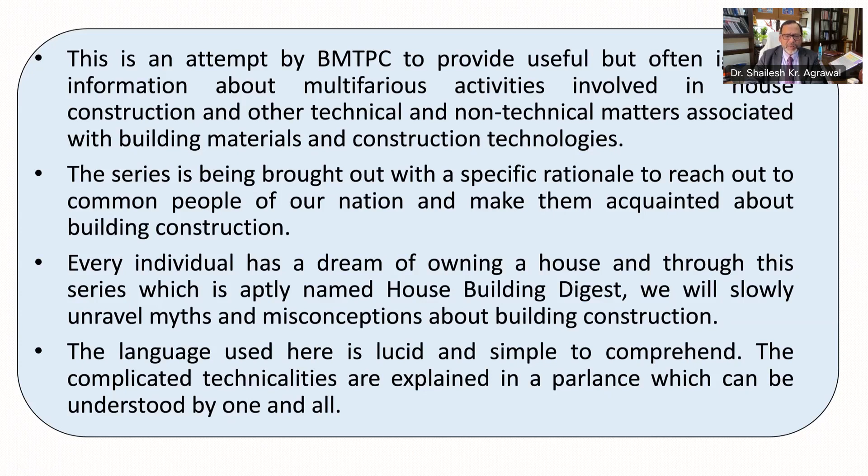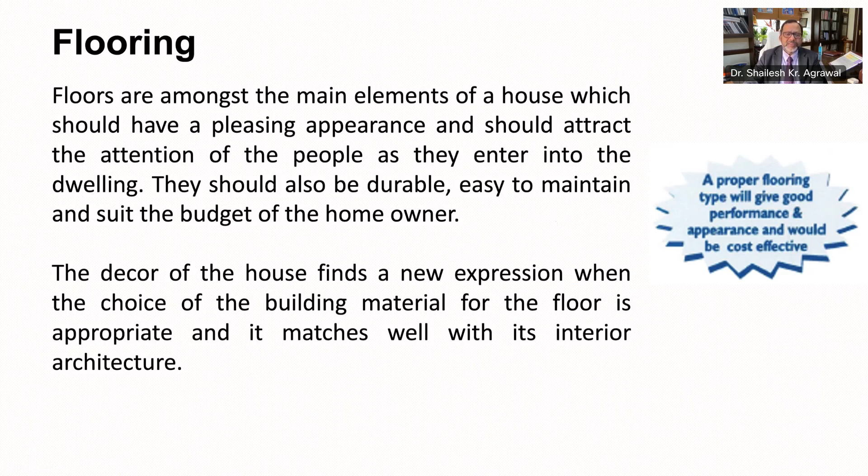Having discussed main building elements, including doors and windows, now let us move to floors. Flooring, being a main element of the house, must have a pleasing appearance and should attract the attention of people as they enter your house. Also remember, flooring should be durable, easy to maintain, and suit the budget of the owner. Normally, choosing a floor of appropriate material and appearance matching the interior architecture of the house gives aesthetic and new expression to the house. In this digest, we will discuss different types of flooring to choose from.

There are different types of flooring: brick floors, mosaic floors, tile floors, wooden floors, cement floors. There are umpteen number of flooring options available nowadays. Therefore, the selection requires careful consideration, and different types of flooring are to be provided based on the use the floor is being put to. For example, the living area may have a superior quality floor, the bedroom may be of good quality, and wet areas may have floors avoiding skidding, so the type of flooring has to be chosen accordingly.

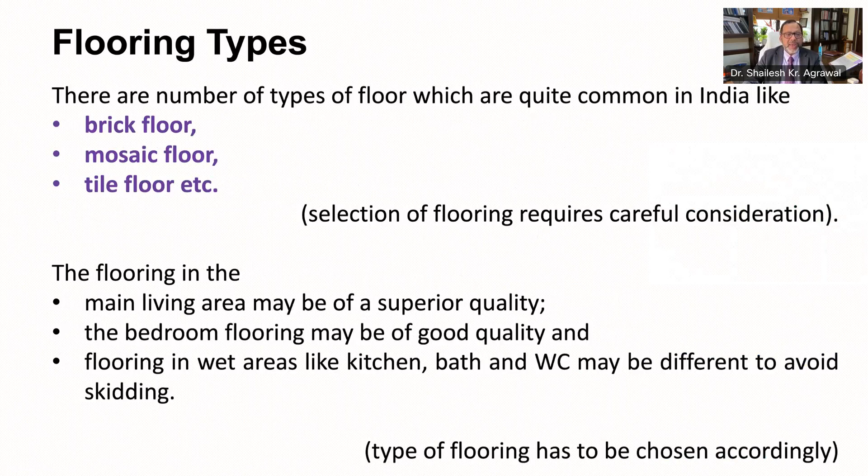Similarly, let's talk about climatic conditions. The flooring to be chosen depends upon the climatic conditions. For example, in extreme hot or cold conditions, marble or stone flooring needs to be avoided as it may make walking difficult. Similarly, slippery floors are to be avoided in exterior locations such as balcony, terrace, or wet areas.

It is pertinent to mention here that flooring for non-residential areas like institution buildings, airports, factories are provided in different manners as they are subjected to heavy use. Please remember, flooring to be adopted for the house therefore depends not only on use of building and climatic condition, but also on local availability of material and flooring. Also, overall costs need to be kept in mind while choosing flooring.

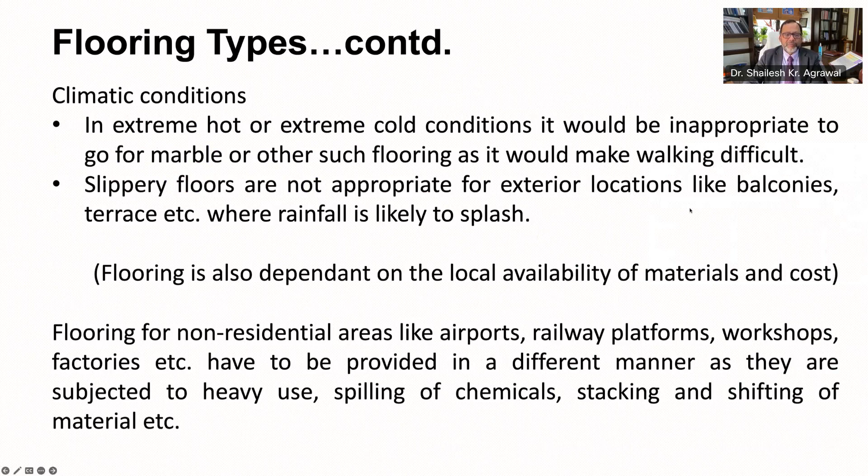Now let's discuss different types of flooring. As you can see here, the most common types of flooring used in India include mud flooring, brick flooring, stone flooring, concrete flooring, terrazzo flooring or mosaic flooring, marble flooring, tile flooring, wooden flooring, bamboo flooring, and linoleum flooring. All these kinds of flooring have different performance characteristics and will be explained to you in subsequent slides.

It is always advisable to have a look at the flooring being used in the area and also discuss with your architect before choosing the flooring for your house.

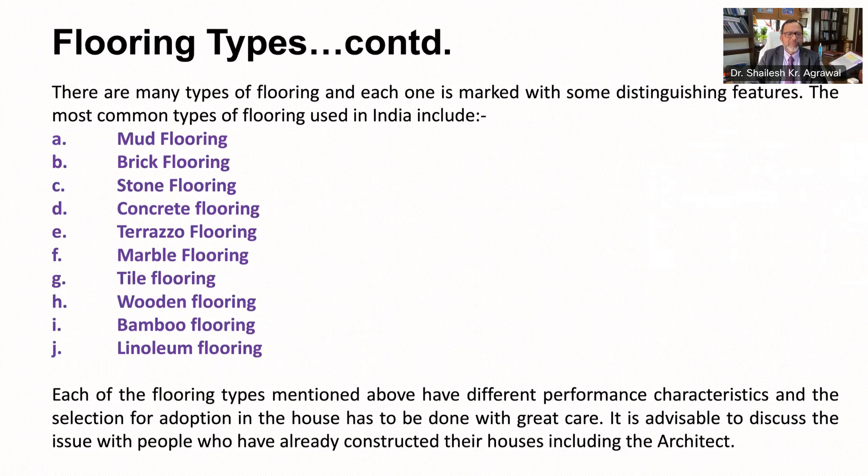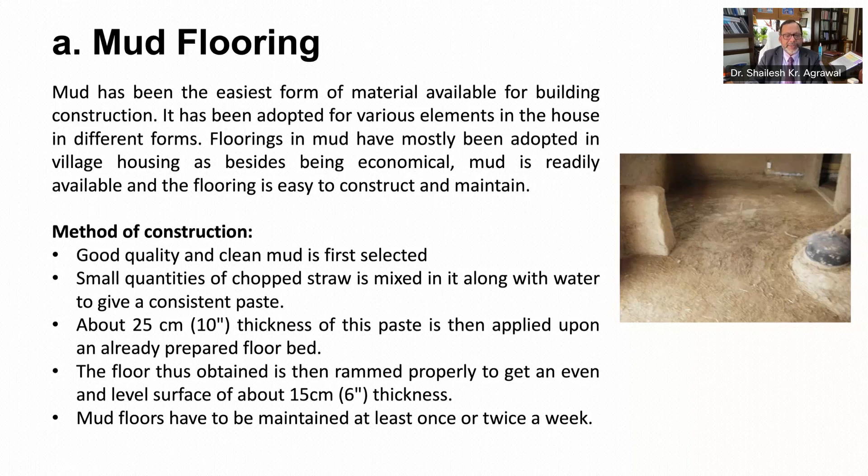Let's see mud flooring. Mud flooring is quite popular in village housing as it is readily available and its construction is very simple. First, good quality and clean mud is selected and mixed with chopped straws or bhusa along with water to get a consistent paste. This paste is applied on the already prepared bed of the floor and rammed properly to get an even and level surface of about 6 inches. Your mud floor is now ready. These kinds of floors need to be maintained once or twice a week.

Now let's see brick flooring. Brick flooring is of two types: bricks on edge and bricks laid flat. Bricks have been the mainstay of building construction in India since the time of Mohenjo-daro and Harappa. It has been successfully used for foundations, walls, roofs, etc. Brick flooring is advantageous in areas where bricks are available locally. Such flooring is easy to construct with the help of local masons and is also economical.

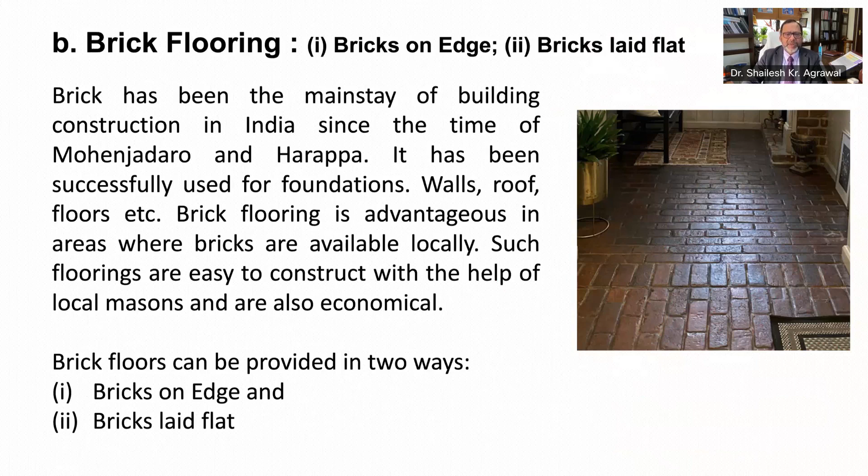Brick floors can be provided, as I told you, in two ways: one is bricks on edge and another one is bricks laid flat. Bricks on edge flooring is most suited for ground floors in a house for interior locations. They can usually be provided as exposed flooring or having a plaster coat on the same. Plastered floors in bricks are better suited for exterior locations like verandas, courtyards, etc., or wet locations like kitchen, WC, etc.

To construct this type of flooring, the filled up earth under the flooring is compacted well, followed by laying of about 10 to 15 centimeter or 4 to 6 inches of cement concrete in proper slope for draining out water. Bricks required for flooring are to be adequately soaked in water for at least 6 hours before use so as to keep them wet.

Then a 12 mm mortar is laid on the already prepared concrete base. On this mortar bed, bricks are laid on edge and jointed with mortars. Bricks can be laid in a pattern.

If the flooring is to remain exposed, the joints should be rendered flush and finished to get an even surface. The surface so obtained should be kept moist for a period of at least 7 days.

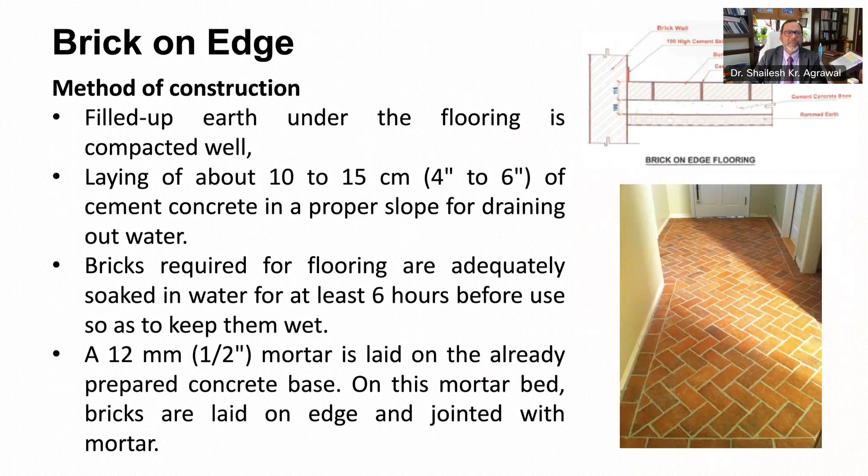Now let's discuss bricks laid flat. These kind of flooring with bricks laid flat are prepared in the similar manner as the bricks on edge flooring. In this case, the brick floor thickness is kept 7.5 centimeter or 3 inches as against 11.5 centimeter or 4.5 inch in case of brick on edge flooring.

The number of bricks used in such a floor is less than the numbers used in brick on edge flooring, as also the quantity of mortar. Such flooring system is most suited for upper floors as the weight coming on the walls and foundation is comparatively less on upper floors.

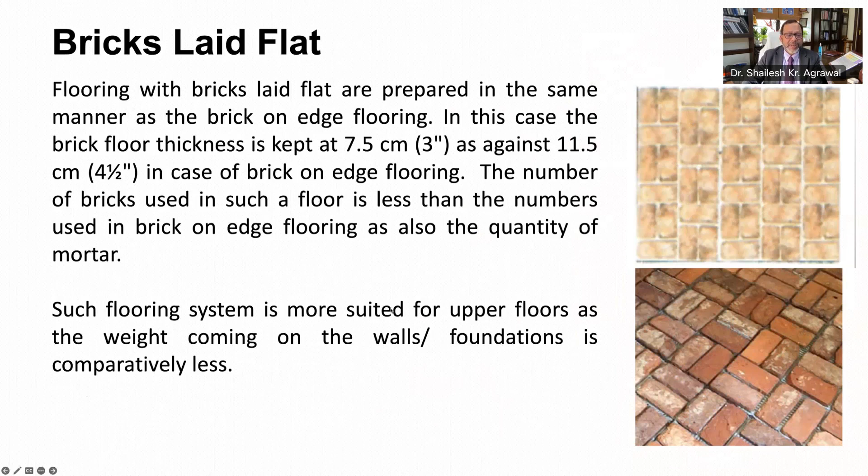Let's see now stone flooring. Stones are available in plenty across the entire stretch of the country. Many of these are suitable for providing floors in residential construction. You can see Kota stone, sandstone, granite. Stones suited for the purpose should be strong and able to withstand abrasion and impact besides giving a pleasing appearance. Let's discuss them one by one.

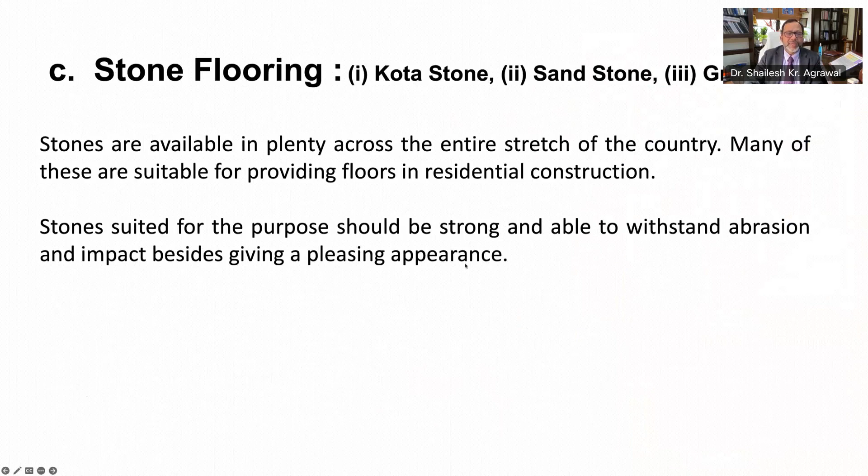Kota stone is a quarried stone which is cut into different sizes for the purpose of providing flooring in residential areas, including on steps, risers, and landings. The stone used for the purpose should be of good quality, free from cracks and other such flaws. The thickness of the stone may vary from 2 centimeter to 4 centimeter depending upon the location it is being used. The top surface of the Kota stone is polished before being brought to the site.

For laying the Kota stone flooring, the following method is to be adopted. First, the base concrete or RCC slab is to be cleaned, wetted, and mopped. Then, cement mortar of proportion 1:4, 1 cement and 4 coarse sand, is spread as a bed having an average thickness of 2 centimeter. The stone is then cleaned, washed before placing it on the mortar bed. The stone is then tapped with a wooden mallet to enable proper fixing. The process is continued till the flooring is achieved in a proper slope and finish.

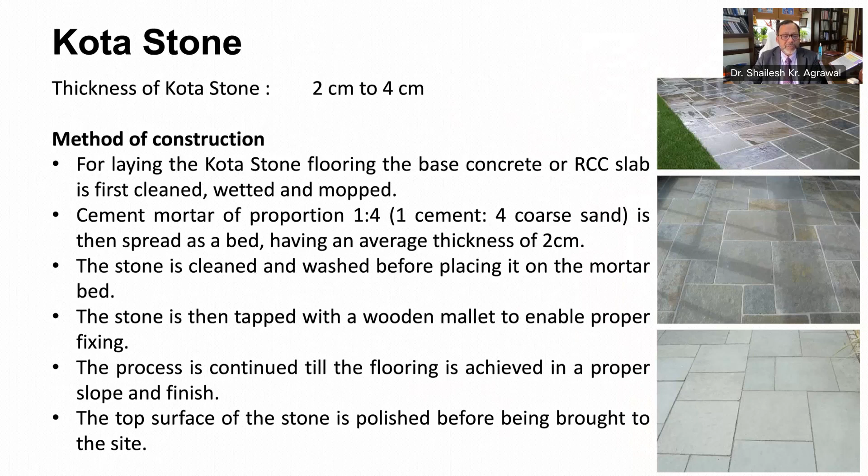Now let's discuss sandstone. Sandstone is another type of stone having different physical and chemical properties as compared with Kota stone. It is usually available in white or red color. Each stone is cut into required size and shape for application as flooring. The finish thickness before application is usually 4 centimeter or 40 mm.

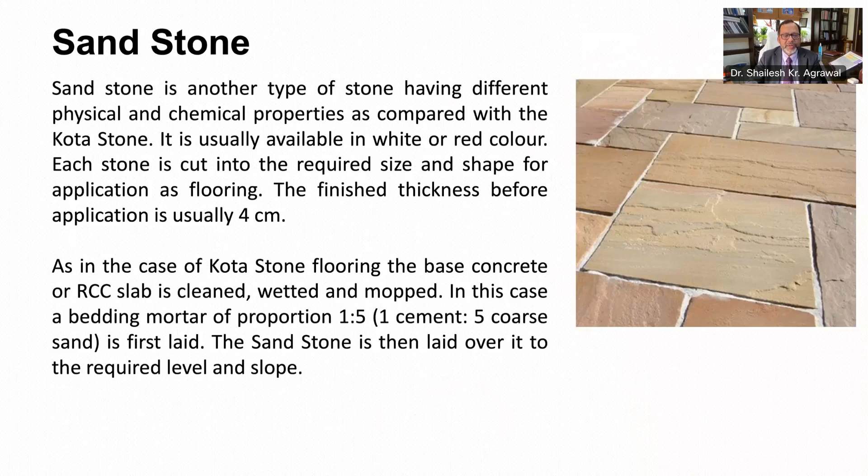As in the case of Kota stone flooring, the base concrete or RCC slab is cleaned, wetted and mopped. In this case, a bedding mortar of proportion 1:5, where 1 is cement and 5 is coarse sand, is first laid. The sandstone is then laid over it to the required level and slope.

Let's now move to another kind of stone flooring, that is granite floor. Granite is a natural stone which is immensely used in house construction, including of floors. It is available in various forms like tiles, blocks. Its fabrication and polishing is also a well-defined process which needs to be executed only by well-trained and experienced hands. The natural shine of granite may last forever if it is treated with care. Flooring with granite is amongst the costliest, although it gives an elegant and pleasing look. The laying procedure for the granite stone flooring is similar to that of Kota stone or sandstone.

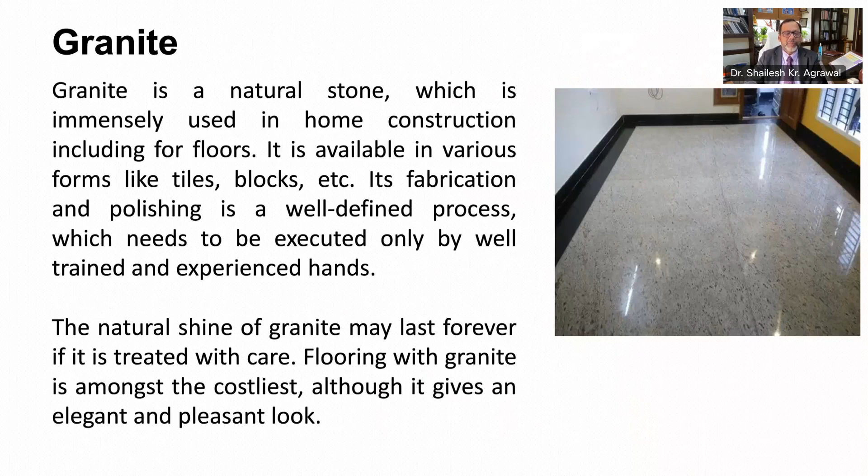Next is cement concrete flooring, also known as IPS flooring. This is one of the most common types of flooring provided in houses. It is quite durable and easy to construct and maintain, besides being economical as compared to tile, marble or other such types of flooring. In most government houses, this kind of flooring used to be preferred.

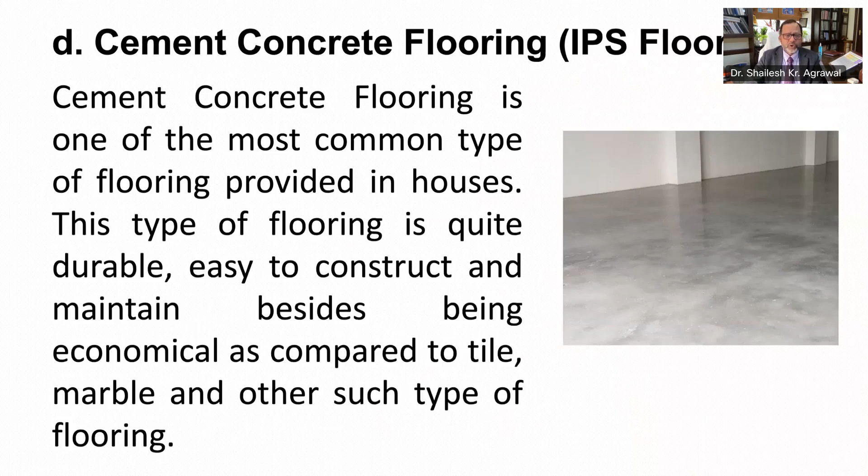When such a type of flooring is to be used for the ground floor, the following procedure is adopted. First, the earth in the plinth is properly consolidated. Then a layer of clean coarse sand about 10 to 15 centimeter thick is uniformly spread over the earth filling. During its consolidation, care has to be taken that a proper slope as required for the floor is provided.

The base concrete, either in cement or lime, should be laid about 7.5 to 10 centimeter thick over the coarse sand in the required slope, and tamped properly. The top of this base concrete should be leveled to a rough surface and left to set and harden.

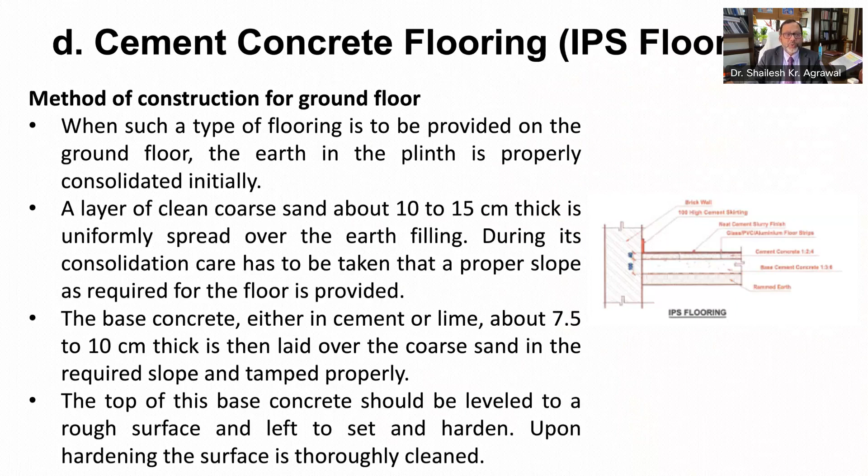Upon hardening, the surface is properly cleaned. The top of the floor is then divided into panels, rectangular or square in shape, by using glass or other strips. The area of each panel should preferably be less than 2 square meters.

Once the paneling has been done, the top of the base concrete is made damp and cement slurry is applied on it. This slurry creates a proper bond between the base concrete and topping. Normally, cement concrete of 1:2:4, where 1 is cement, 2 is sand, and 4 is coarse aggregate, of required thickness, say about 4 centimeter, is provided as topping concrete.

The top surface is thoroughly tamped and floated with wooden floats to obtain a smooth surface. The surface so obtained is cured for about 10 days before putting it to use.

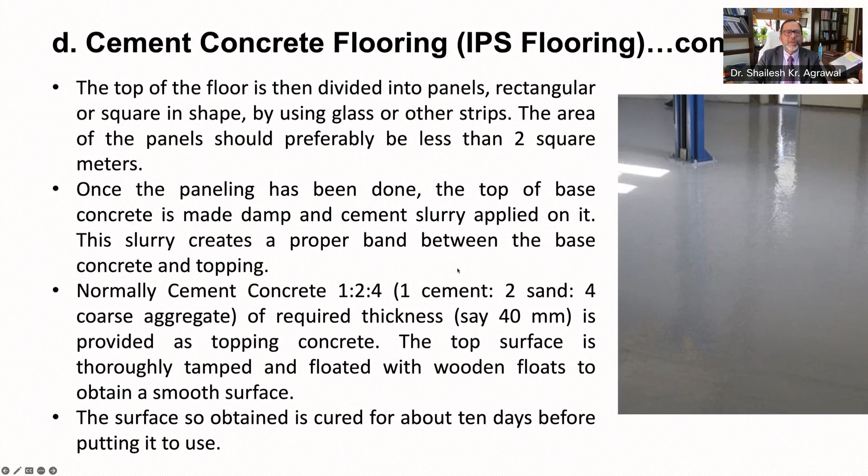Now let's see cement concrete flooring for upper floors. When this kind of flooring is to be provided on upper floors, the top concrete, as you can see in this figure, is laid directly over the RCC slab. At times, a cushioning layer of lime mortar is also applied over the RCC slab before laying the top concrete.

Cement concrete flooring can be finished with a plastering layer of 10 mm thick red oxide of iron, which would give a red color look to the surface. Different designs can be made by forming panels in the floor and filling them with plasters of required color.

Lately, there has been a practice of polishing cement concrete floors to give them a shining finish. Polished concrete is a high gloss finish attained by using special floor polishers to grind down surfaces to the desired degree of shine and smoothness. The resulting surface requires less maintenance and can be stained to replicate the look of polished stone. Polishing of concrete floors adds to its cost.

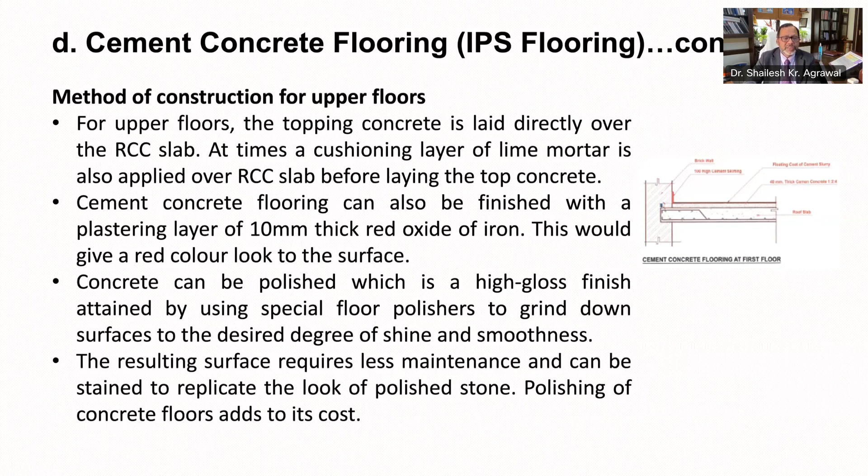Now let's move to another category, which is mosaic flooring or terrazzo flooring. This is another type of flooring that has been commonly used in India. As this type of flooring gives a pleasing look, it has been extensively used for living rooms, bedrooms, etc.

This type of flooring is provided in the same manner as cement concrete flooring, except that the top layer consists of terrazzo, which is a mixture of marble chips and white or colored cement in the ratio of 3:1. For a 40 thick terrazzo floor, an upper layer of concrete 34 thick is first provided over the base concrete, which is finished with a topping of terrazzo 6 thick.

Paneling, etc., can also be done as in the case of cement concrete flooring. The surface obtained after application of the terrazzo floor is damped and rolled and left to dry for about a day or so. After this, the surface is cured for about 2 to 3 days with standing water.

The grinding of the surface is then done 2 to 3 times, either by hand or by grinding machine using carborundum stones. In case the chips become loose or come out of the surface, repairing has to be done with cement grout.

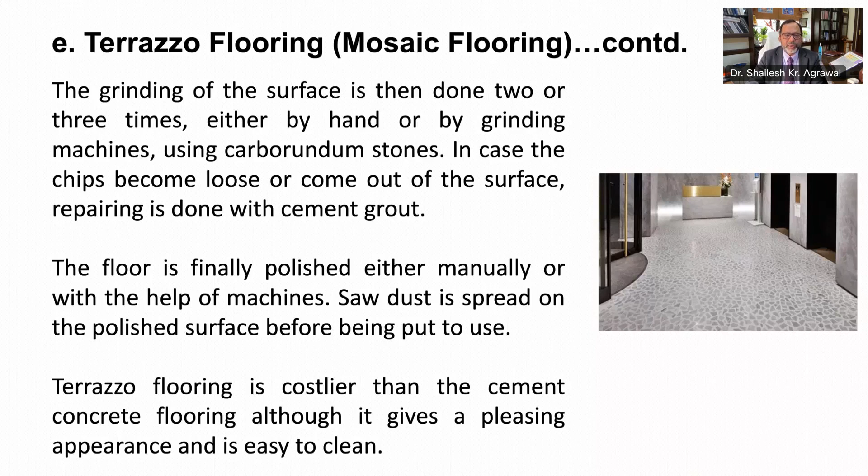The floor is finally polished either manually or with the help of machines. Sawdust is spread on the polished surface before being put to use. Terrazzo flooring is costlier than cement concrete flooring, although it gives a pleasant appearance and is easy to clean.

Let's see now marble flooring. Marble flooring has traditionally been provided in religious places, palaces, havelis, etc., as it enhances the look of the structure. Lately, such flooring has been used extensively in residential buildings also.

The method of construction is as follows. Marble flooring is laid on the prepared subgrade or RCC slab. Upon cleaning the subgrade, a 20 thick mortar in cement and coarse sand in the ratio of 1:4 is first applied. Each marble slab is then placed and pressed on the bed mortar. The marble slab is then lifted and mortar filled up in the hollow portions.

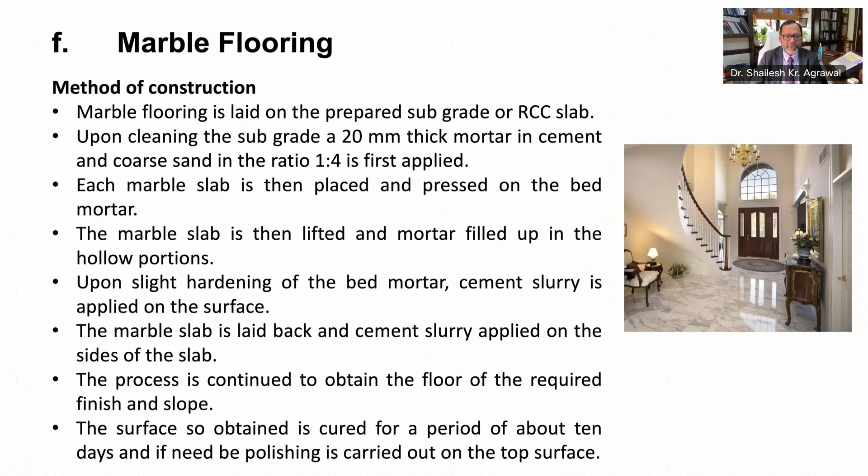Upon slight hardening of the bed mortar, cement slurry is applied on the surface. The marble slab is then laid back and cement slurry is applied on the sides of the marble slab. The process is continued to obtain the floor of required finish and slope. The surface so obtained is cured for a period of about 10 days, and if need be, polishing can be carried out on the top surface.

Now let's see tile flooring. Flooring tiles in India have been there over the years, and it has gained popularity over cement and concrete floors. Flooring tiles are available in different patterns, designs, and utility options. Usually, they are costlier than cement concrete flooring, and its cost depends upon the type of tiles being used.

Various types of flooring tiles in India include terrazzo tiles, checkered tiles, glazed tiles, vitrified tiles, PVC tiles, etc. A wide variety of tiles are currently available in the market, and homeowners have to make a choice depending upon the finishing to be provided in the house, its location, the local availability, as well as the budget for putting up the floor. Various types of tiles will be discussed in subsequent slides.

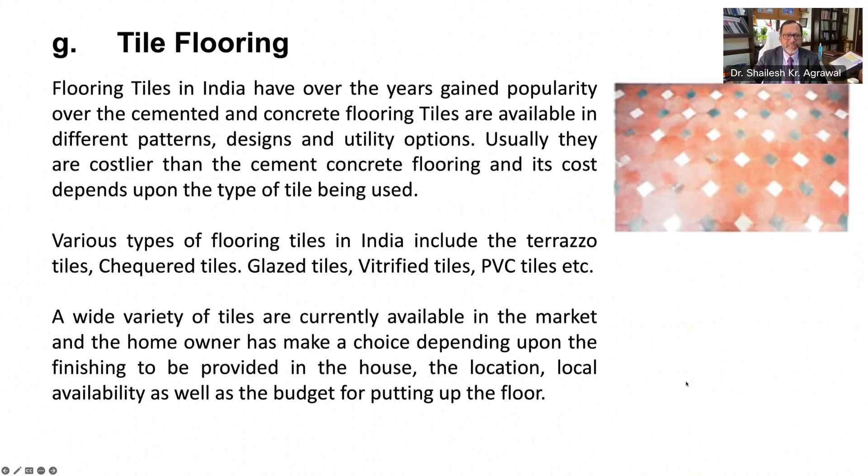First, let's see terrazzo tiles. These are available in the market with sizes varying from 20 centimeter by 20 centimeter to 30 centimeter by 30 centimeter, and their thickness varies from 2 centimeter to 3 centimeter.

Such tiles can be used in the living room, bedroom, as also in the risers and treads of the staircase. The tiles are laid on a base concrete or base slab, RCC slab, usually by providing a cement sand mortar of average 3 centimeter thickness. Before putting the tiles on the mortar bed, they should be thoroughly cleaned and ultimately laid in the desired slope.

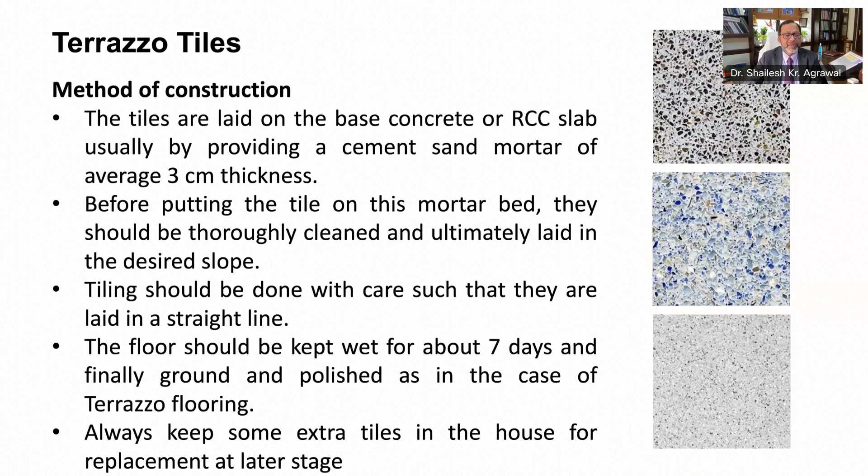Tiling should be done with care such that they are laid in a straight line. The floor should be kept wet for about 7 days and finally ground and polished as in the case of terrazzo flooring. It is advisable to keep some extra tiles in the house which may be required as and when some of them require replacement.

Let's see another kind of tile, which is checkered tiles. These are similar to terrazzo tiles except that they have grooves of about 2.5 centimeter in both directions. The method of laying such tiles is similar to that of other tiles. Care has to be taken to finish the grooves in a proper manner.

Checker tiles can also be provided on the walls to give it a different look. Usually, they are costlier than plain terrazzo tiles.

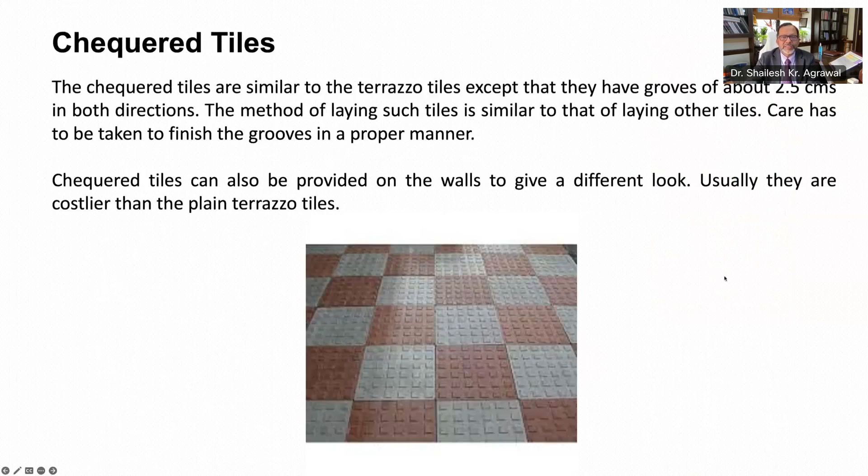Let's see another kind of tile, which is glazed tiles, available in the market having either a glossy finish or matte finish. Tiles having a matte finish are usually provided in wet locations in the house, like kitchen, bathrooms, WC, or in exterior locations where rainfall is coming, like balconies, verandas, etc., to reduce the chances of slipping as well. They are usually available in sizes of 10 by 10 centimeter, 15 by 15 centimeter, or 10 by 20 centimeter.

The colors can be white or different, and these tiles have patterns. They are laid in a similar manner as other types of tiles. The joints between the tiles are flush pointed to give an even surface. Such tiles do not require grinding or polishing.

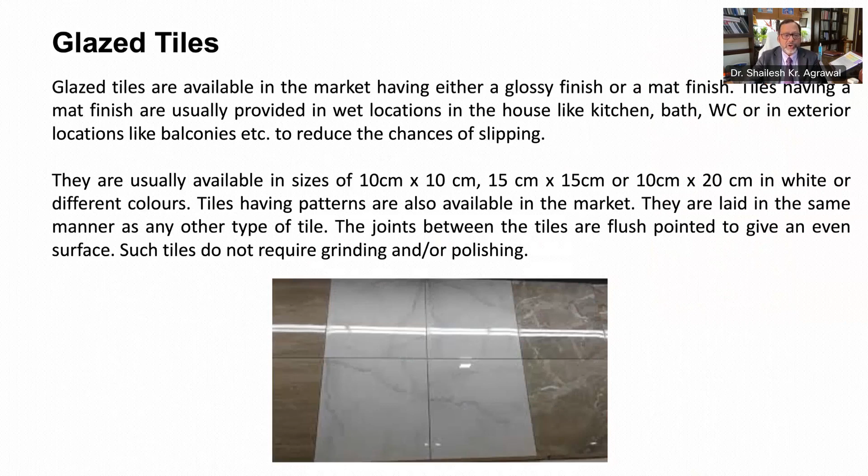Next kind of tiles are vitrified tiles. They are increasingly being adopted nowadays for construction of floors in residential buildings.

They are quite sturdy and can be provided with equal ease both on new surface or on an existing flooring. Although they give a good look and can be cleaned easily, they are quite costly as compared to other tile floorings explained to you.

Vitrified tiles are available in glossy or matte finish, having different designs and patterns. Sizes up to 60 centimeter by 60 centimeter are also available nowadays in the market, and accordingly, each tile covers a large area. The flooring is provided in a similar manner as that of other types of tiles.

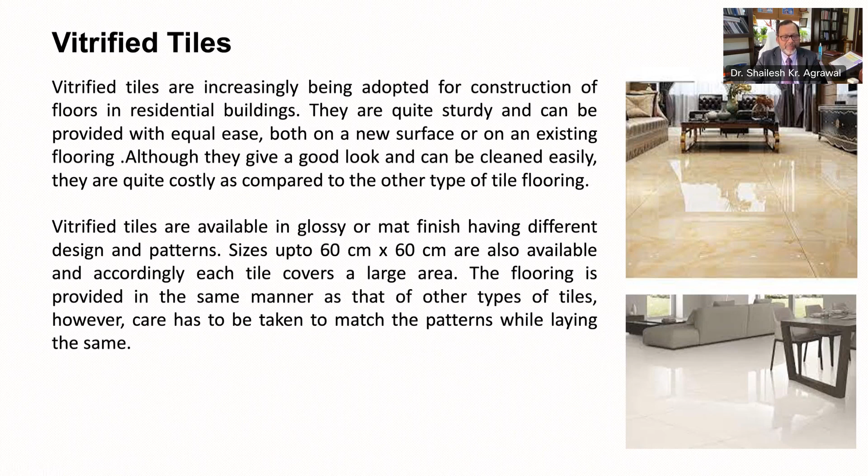Next kind of tiles is PVC tiles, which are being used for flooring in residential as well as non-residential buildings. They can be provided for decorating the floors. These tiles are costly and acoustically have a superior performance, although they are combustible.

They are, however, easy to clean and maintain. PVC tiles are usually square in shape, having sides of 30 centimeter by 30 centimeter, 60 centimeter by 60 centimeter, or 90 centimeter by 90 centimeter. Sheets and rolls of PVC are also available for providing large floors. These tiles are fixed to the floor tops with the help of adhesives, especially recommended for the purpose.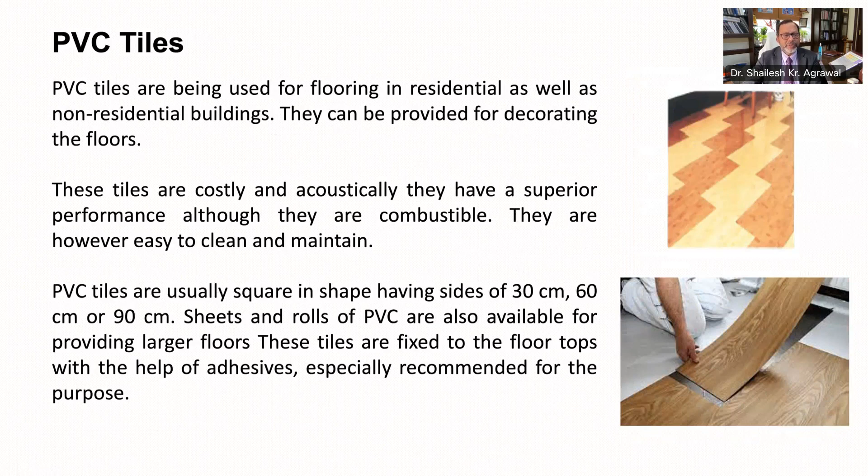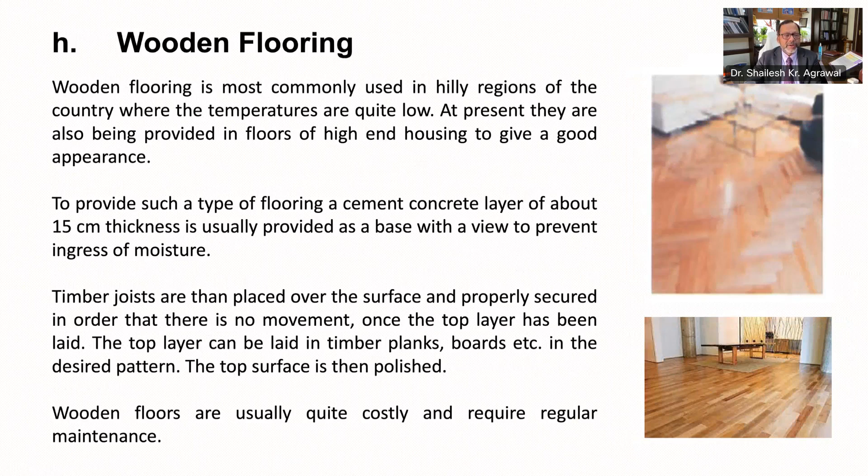Next is bamboo flooring, which is also very common now in areas where bamboo is available locally. However, such floorings have recently become quite popular due to their aesthetics being uniquely attractive, strong and resilient, dimensionally stable, moisture and stain resistant, and environment friendly.

It is also said to have better properties than hardwood. Another outstanding property of bamboo is its dimensional stability and moisture resistance. Accordingly, it is suitable for use in areas like bathrooms and kitchens where hardwood flooring is usually not recommended. It is also less expensive than many hardwoods and readily available for nailing down or glue down installations.

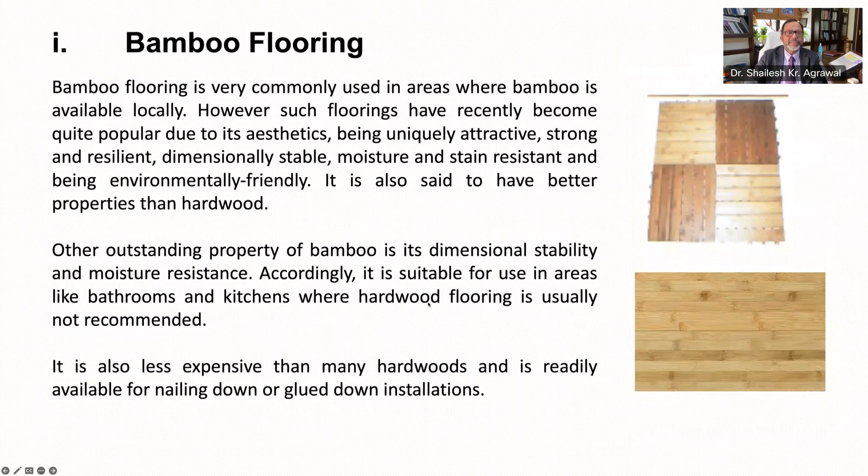Let's move to the next category, which is linoleum flooring. This kind of flooring is usually provided on a floor base which is already smooth and plain. It is suitable for interior locations in the building. Linoleum is a combustible material and should not be used in areas prone to fire. It should also not be used in areas which are likely to become damp over a period of time.

For residential areas, the thickness of linoleum usually recommended is 3.2 mm. Linoleum is available in rolls and should be first cut to sizes slightly more than the floor size. It should then be left for 2 to 3 days to allow it to shrink. It is then cut to the actual size and stuck to the finished, clean and dry floor surface with the help of adhesive. For a longer life, linoleum flooring should be kept dry when in use.

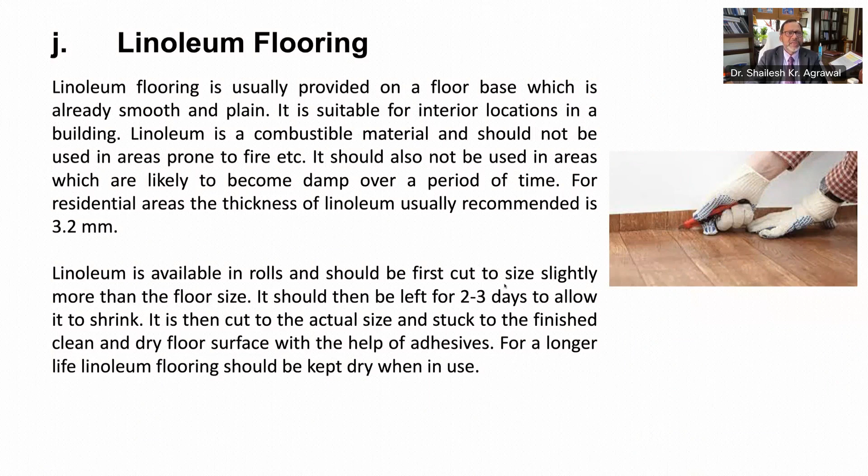Having finished different kinds of floorings, now let's see another important aspect of flooring, which is skirting or dado. This is the process of covering the lowest part of the interior wall and is part of your flooring. It is usually provided after completion of flooring in the house. Its prime purpose is to cover the joint between the wall surface and the floor.

Skirting protects the wall from abrasion and knocking and reduces the chances of floors getting damaged at its edges and corners. It also provides a decorative finish to the floor walls besides covering the blemishes, if any, in the floor or edges at the junctions and corners. Skirting is usually provided up to 10 to 15 centimeter above the floor level and mostly of the same material and specification of the flooring itself. If provided in cement, concrete or terrazzo, the thickness is kept around 12 mm.

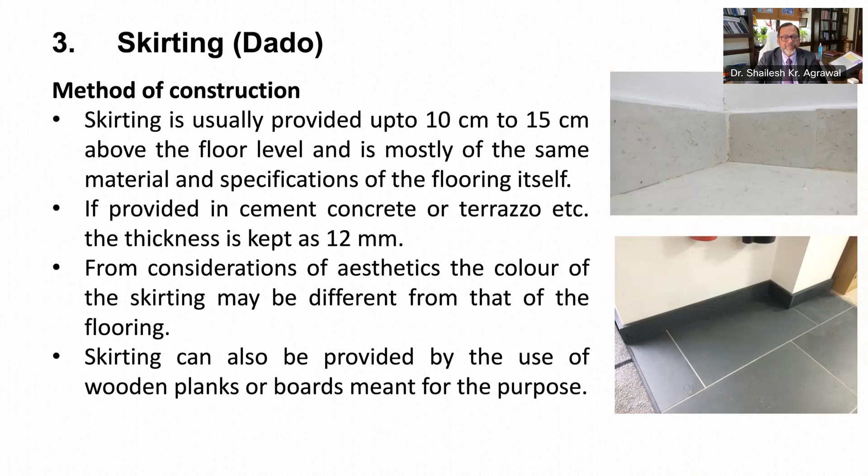From consideration of aesthetics, the color of skirting may be different from that of flooring. Skirting can also be provided by use of wooden planks or boards meant for the purpose. Presently, a large number of designer skirtings are available in the market, which provide a good decorative finish.

These tiles can be stuck to the wall with the help of a mortar. Bigger size of tiles and marble stone can be cut to the required sizes to provide the skirting or dado. Care should be taken that the skirting is of uniform thickness and height is provided.

In case of wet areas like WC and bath, large heights of walls require protection, and accordingly the skirting has to be done differently and is termed as dado. Dado can be provided in a similar manner as skirting, except the height is usually kept around 2.1 meters or 7 feet. If however there are any blemishes in the plaster, it can be covered by adjusting the thickness of skirting and dado.

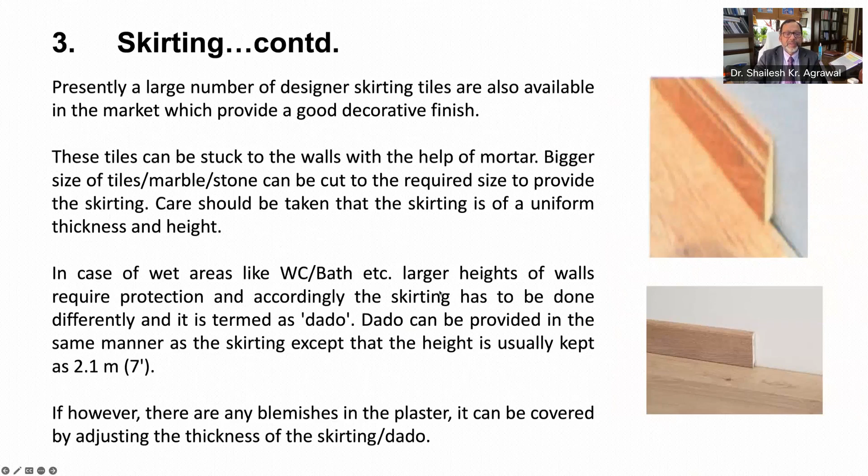Having constructed the floor, the next most important thing is to maintain these floors properly in order to retain the original look for a longer time and prevent damages. Simple do-it-yourself flooring maintenance is important for keeping the floor looking good, and so is calling a professional once in a while for advice on maintenance.

Brick flooring usually requires maintenance of the joints. The damaged joint should be raked properly and filled with mortar as and when required. Similarly, broken bricks, if any, should be replaced immediately, or other bricks of flooring may become loose, thereby damaging the floor. Similarly, the damaged portion of concrete flooring would require immediate repairs, thereby preventing further damages to the floor.

Marble flooring, on one hand, is hard and durable, lasting for years, whereas on the other, the polished surface can be damaged by chemicals, stains, and abrasion. Such floors should therefore be used and maintained properly.

Timber floors also require good maintenance. Moving or dragging furniture on timber floors may cause damage. Accordingly, protective pads should be fitted beneath furniture legs to prevent scratches. Such floors should be cleaned using as little water to help keep floors clean. Place doormats outside, and preferably inside, each external door to trap dirt.

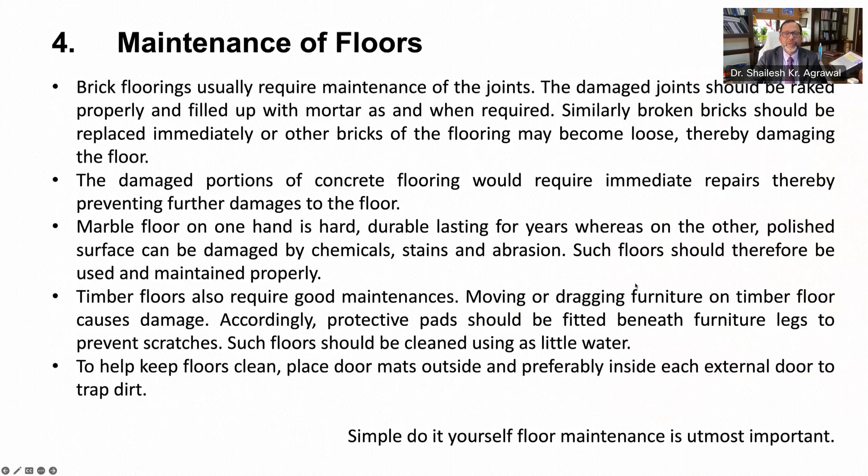Flooring can be provided, as explained in this slide, in a number of ways. The choice of flooring is dependent on local availability of the material, climatic condition, and skill of the manpower available. It also depends on the choice of the homeowner as well as the budget available. It is always advisable to discuss the issue with the architect before finalization of the specification.

There are a number of agencies which specialize in providing flooring in a house. The house owner is advised to look into their websites, which will give a fair amount of idea of different types of flooring as well as their costs. The matter can also be discussed with persons who have had their houses constructed in the area.

Whatever be the type of flooring to be provided, some precautions should be observed during construction: the base and sub-base of the floor at the ground floor should be prepared with great care, strictly following the construction specification procedure. The required slopes for the floor should also be given in the base course itself.

Metallic or other strips as may be required to lay the flooring should be laid in a straight line. Curing of floors, including that for base concrete, should be carried out properly such that the required strength is obtained. Tiles for flooring should be laid on a mortar bed in a manner that no gap is left between the floor and tile at any place. Tiling should be tapped properly in the mortar bed to ensure proper level.